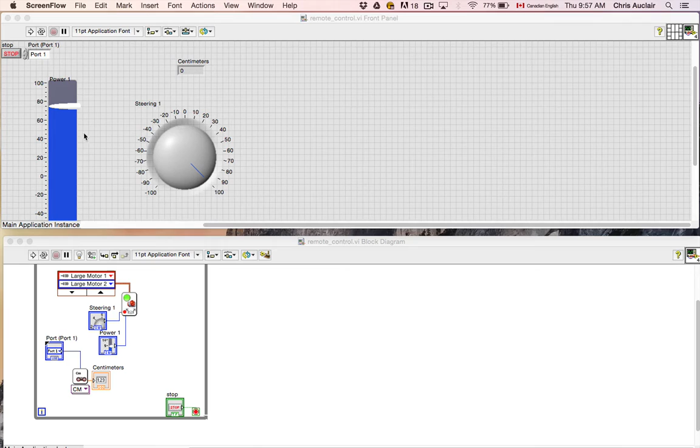And as you can see here, I'm giving you kind of a preview of the program. It's a simple series of instructions that we are going to code. The only difference is that instead of creating numeric constants as we have in the past for programming autonomous robots, we are now programming with controls, and every time we add a control, the control literally gets added here to the front panel, and these are the controls that we will be manipulating to actually navigate our robot and have it do the things that we want it to do.

Okay, so now let's proceed to actually looking at how we can create this program. So I'm going to go to New, Virtual Instrument, and I get my two windows. I'm going to tile these up and down. And next I'm going to open my controls palette. Now the controls palette belongs to the front panel. And if I click on the block diagram, I can see my functions palette is activated. If I'm clicked on the front panel, I don't see the functions palette activated.

So I have to click on my block diagram panel, and then I can select view functions palette. You'll notice that when I click on the block diagram, I only see now the functions palette. In order to see the controls palette, I have to click on the front panel, and the controls operators appear. That's because each set of instructions belongs to the particular window. Now, the last thing I want to bring up are my tools. They should always be open. Okay, let's jump right into this.

Let's go to the MindStorms robotics coding section, and I'm going to start by going to the input outputs, and I'm going to go to the advanced motors, or I'm going to drag in the Lego steering on command. Okay, now I'm going to add some modifiers to this, and you'll notice that there are quite a few connectors here. So let's start with the one in the top center and define the motors that will be connected to this. So I'm going to right click on there and choose create constant, and the first motor that I will choose will be port A. I'm going to add a second motor and add that motor to port B.

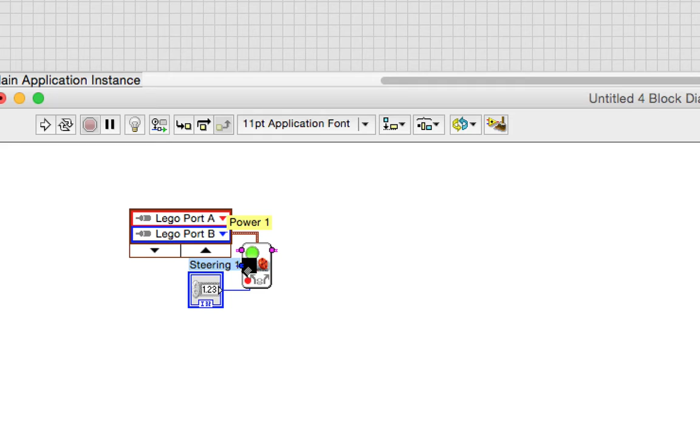And furthermore, I'm going to wire the power connector right over here. Right click on that blue connector that's halfway up on the left side of the steering icon and go to create control. And so again, jumping back to my front panel, you'll notice that we have a steering field and we have a power field with a little knob here to be able to move those numbers up and down. You can also manually type the numbers in. Let me go back to my block diagram.

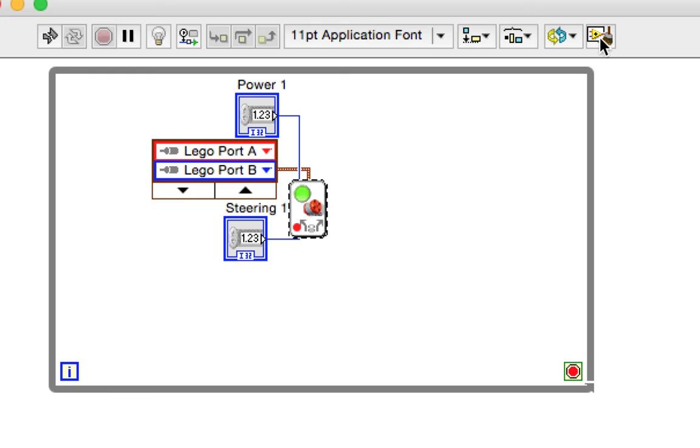I want this program to run infinitely, so I am going to go back to the top level of my MindStorms commands and go into the programming and structures, open up structures, and I'm going to grab a loop, and I'm going to loop this. Now let me take my arrow tool, and actually I'm going to hit this little brush tool to clean everything up. Let's select all of this and hit clean up. And there we go, so we can see everything nice and organized.

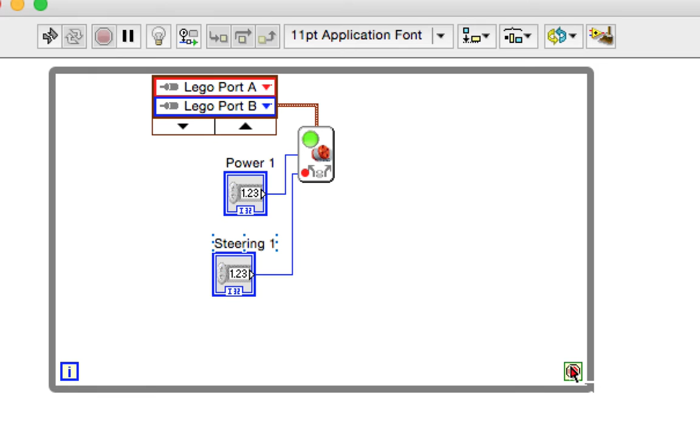Now this is going to loop endlessly until I need a Boolean operator here, and that will be until the stop button is pushed. So let me right click on this stop command and let's create a control.

And there we go. So when the stop button up here is pushed, this loop will stop.

Now finally, as my robot is moving forward, backwards, and steering, I'm actually going to be looking for some tall cones that are about 30 centimeters high and about 10 centimeters wide. And to see those cones, my robot may be placed in the dark.

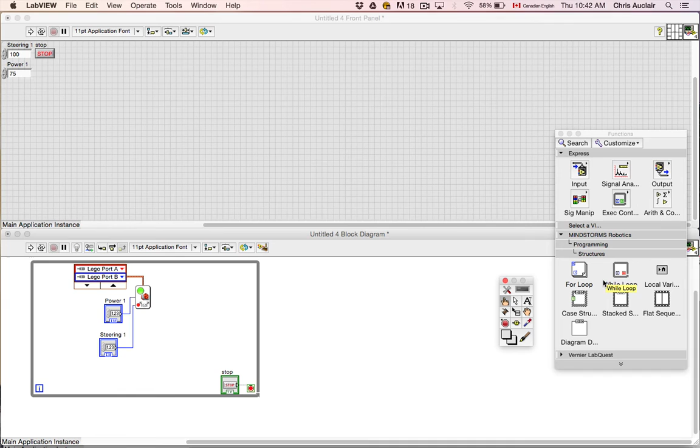So to see the cones, we're going to use an ultrasonic sensor. Let's go back to the programming, to the top level of the Mindstorm's commands. Go to Input Output, and go to Sensor and drag a sensor out here. I'm going to select Read EV3 Ultrasonic in centimeters.

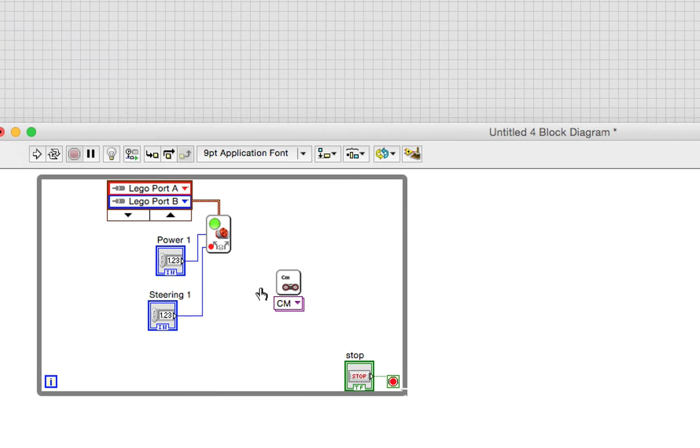I like my spool of wire because it actually allows me to see which connectors I am hovering over. In this case, I need to say which port I'm going to be on. So I'm going to come over here and say create a control, and choose the port from here, be it port 1, port 2, or whatever.

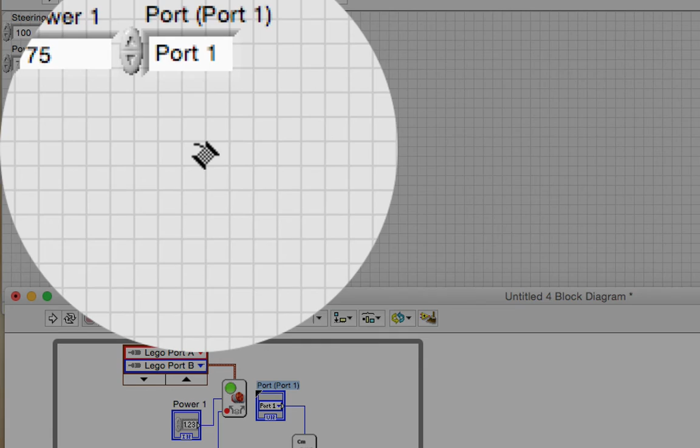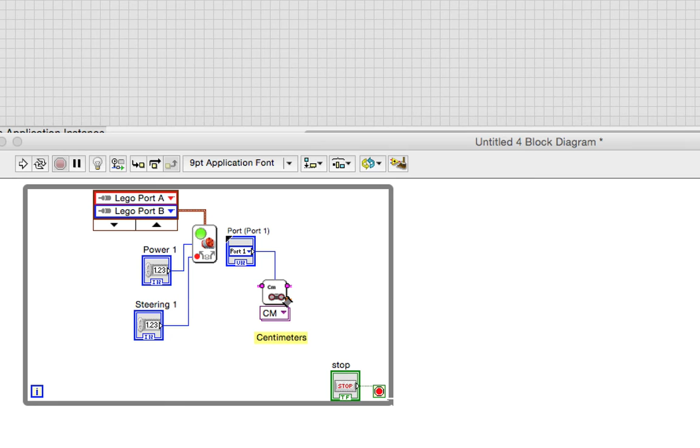Okay, and then finally, I want a field that will output the number of centimeters, give me a reading on how close my robot is to an object. So I'm going to right click on this lower connector here and choose Create Indicator. And there we go. We now have a field that will tell us how many centimeters our robot is away from an object. So this is our program.

This is the wiring. But it is inextricably connected to the front panel. It's kind of like having a TV set which is wired on the inside, and then you have this screen which is displaying the results of all that wiring.

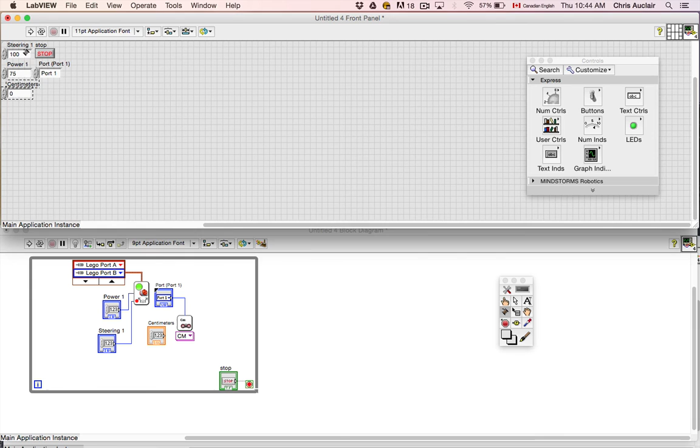And now I'm going to modify these a bit and create a front panel that is more user friendly. Let me start with the centimeters field. I'm just going to move that over here a bit out of the way, and the port goes with it. So I'll select that and put those two together.

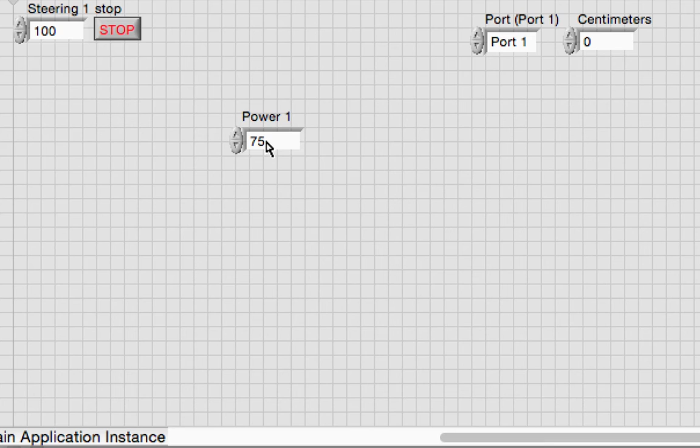Now finally, the power. I'm going to select the power, move that here. I'm going to right click on power, and go to the replace menu, and go to the number controls, and choose a slider. And that will be for my power. Next I'm going to stretch this so it's a little more user friendly and easy to see and manage.

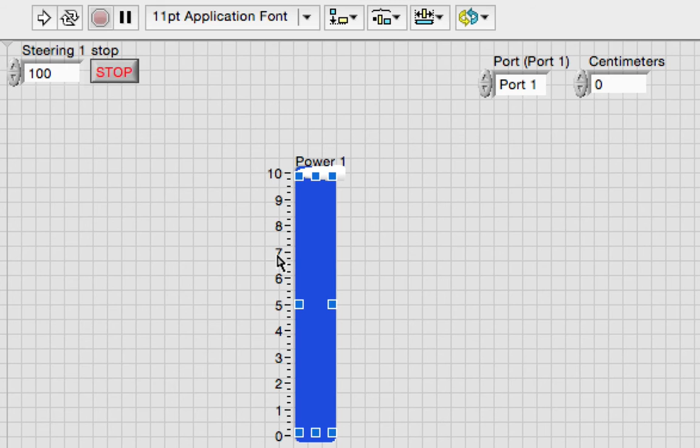Now, our power, we know the power on a robot can go in negatives when it's reversing, positives when it's going forward, and that ranges from negative 100 to positive 100. So we need to change the attributes here because right now we can only go to a positive power of 10. So let's right click on this control and go to Properties, then go over to the Scale tab, and under Minimum set it to minus 100, and under maximum put it to plus 100 and click OK. And now our power lever is a little more user friendly.

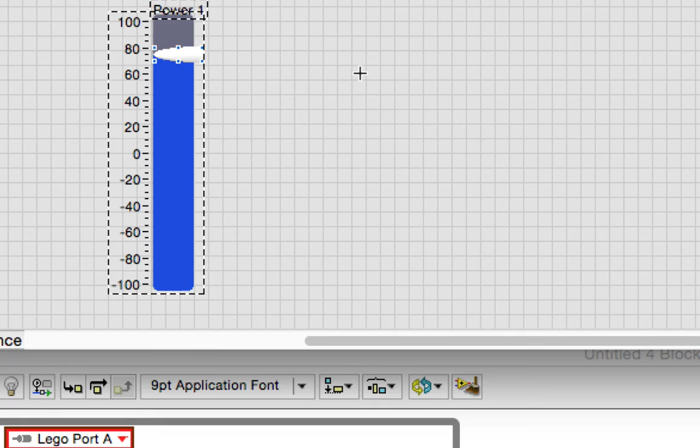Let's go get the steering now and do the same thing. I'm going to right click on the steering field, say replace, go to number controls, and this time I'm going to choose a dial. Click on the dial and scale it up.

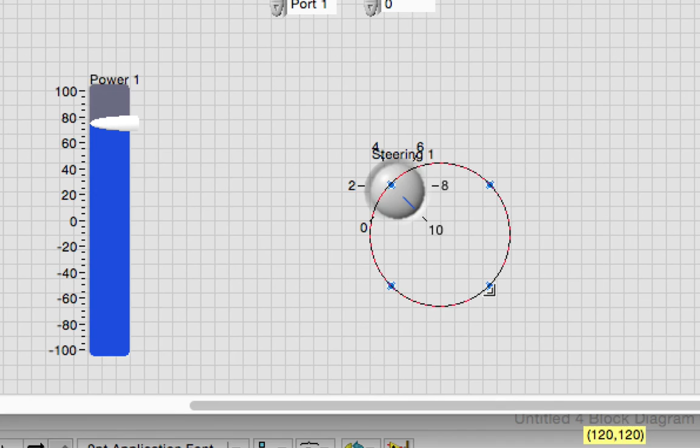Move the steering definition right here. Now I'm going to right click on this and choose Properties, and again go to the Scale tab, and in this case to turn completely to the left would be minus 100, to turn completely to the right would be plus 100. So now our dial will allow us to control which direction the robot is steering in.

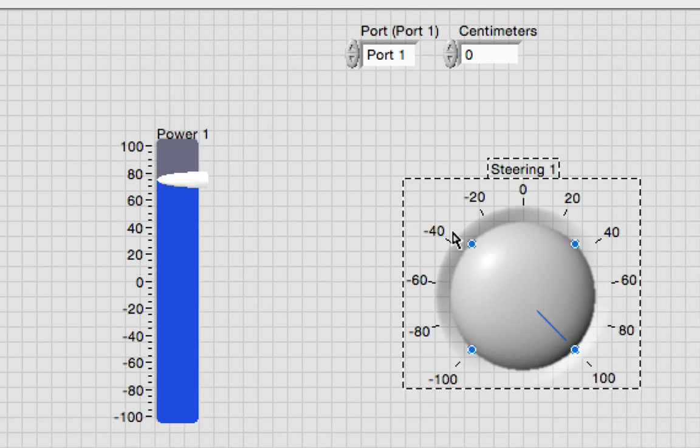And then finally we have this stop button. We can just leave that as a stop whenever we want to stop the program.

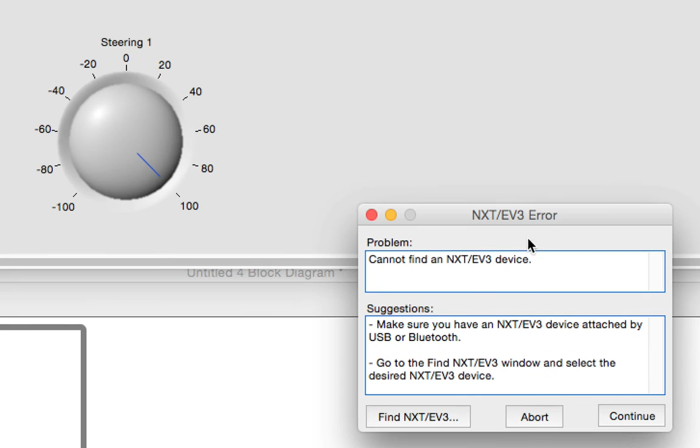Now make sure you've got this set to target to NXT. You hit play, and this program will now start to run. Now currently I'm getting this error message because I don't actually have a robot connected to the Bluetooth. I had disconnected it. So you can always hit Find NXT, and then if you turn your EV3 on and the Bluetooth on EV3 is on, it should find it. You hit connect and things should run accordingly.

Now you may find when you're running the script that you need to adjust the steering so that you're turning in small increments, and your power you may have to run at a slower speed because it's not easy. This is not like a remote game controller, so you may want to set your speed at lower levels and your turning at smaller increments so that you're as precise as possible. Slow and steady wins the race on this one.